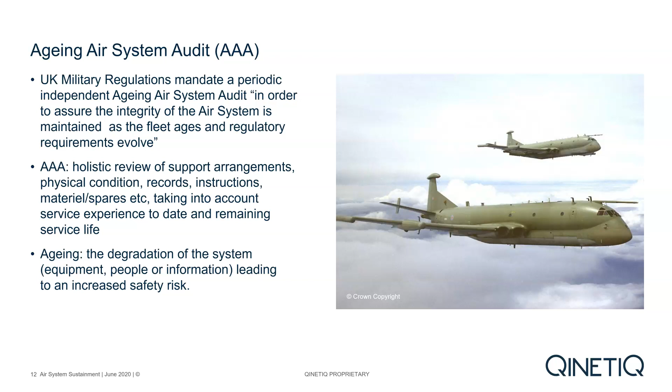The AAA team have broad experience of operations, maintenance and management, plus they bring individual subject matter expertise. In my case, safety assurance, propulsion and flight systems, such that the wider impact of changes is considered carefully. As an example, changes in flight profiles are traditionally considered to affect structural maintenance. However, there may well be an unquantified impact on engines or propellers or other systems.

Similarly, the routine change in role for some aircraft may also introduce wear into structural attachment points as a result of poor installation instructions and maintenance practices. So AAA is both an art and a science, data-based but reliant on experience and knowledge to discern how the dots are joined.

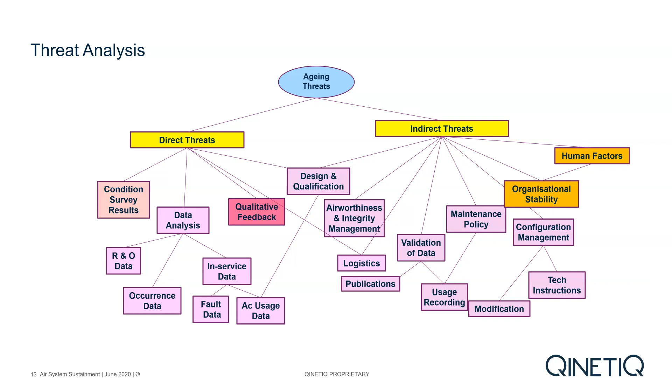One would reasonably expect the majority of operations to be covered by existing instructions for continuing airworthiness. However, there are non-standard operations, for example pipeline surveys or air ambulances and the utilisation of civil aircraft in military roles. While these may fall within the published flight envelope, they may well fall outside of what the type certificate holder assumes typical usage would be. For example, sector length, unpressurised flying, manoeuvre ranges, and the same actually will go for little used private aircraft as well. Hence my belief that some form of a sustainment review is beneficial, and indeed more so in the current COVID-induced conditions.

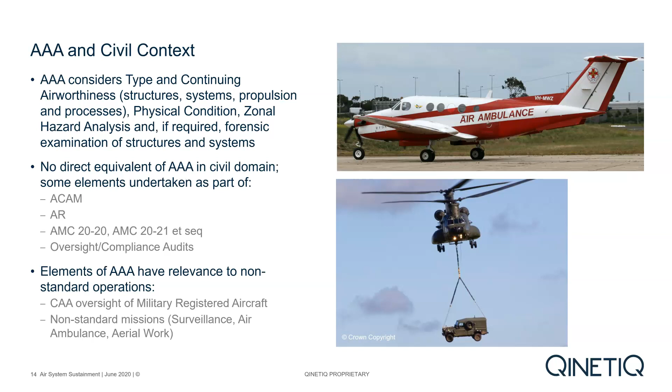QinetiQ has over 15 years' experience in AAA and has conducted them across a wide spectrum of aircraft types, from historic aircraft such as Spitfires and Lancasters, through combat aircraft such as Typhoon, Tornado. It's looked at training aircraft, support helicopters, civil and civil derivative aircraft, gliders and so on. More recently, we've been engaged to assess aircraft that are maintained under civil as opposed to military oversight.

So the first one is flexible hoses that carry flammable fluids. Now, one of the reviews identified that hoses had recommended lives that were aligned with the original service life of the aircraft, which was subsequently extended. Although some hoses had been replaced, these were neither identified as lifed items nor records retained of replacement. Hence, there was a risk of leakage or rupture.

In the interim, best practice had evolved, but had not been taken into account in maintenance schedule reviews. There was also a loss of corporate knowledge due to a series of location changes, and there was significant churn in staff. The condition survey at the time identified a 40-year-old elastomer hose in a brake system.

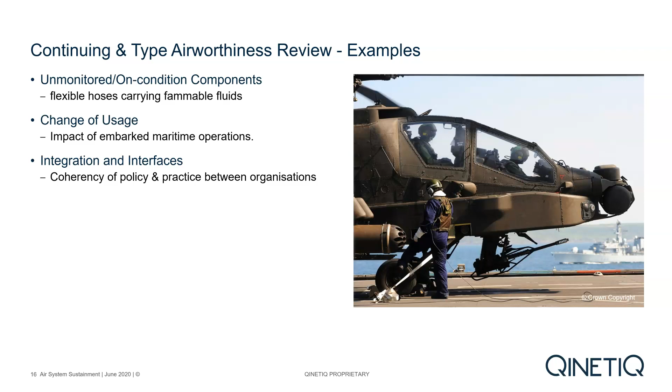In terms of integration and coherency, in one aircraft fleet, we found that there was a policy to conduct a 6-monthly review of corrosion arisings on this particular aircraft. It's quite an older aircraft. However, in practice, this pan-organisation group had not actually convened for 3 years, and in that time neither deteriorating condition of the aircraft was identified, nor the effectiveness of the anti-deterioration measures, where they certainly weren't challenged. Again, the condition survey confirmed the presence of significant corrosion that was actually unknown to the Aircraft Operating Authority.

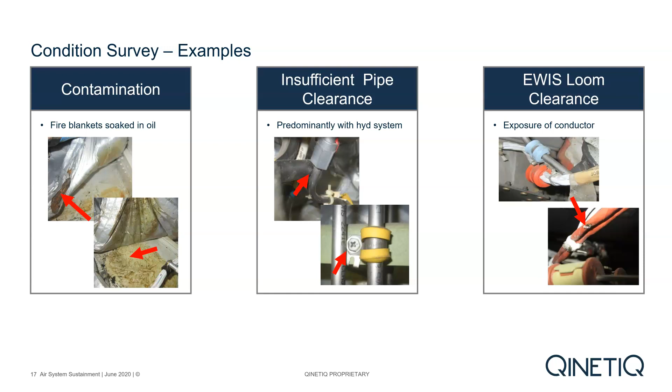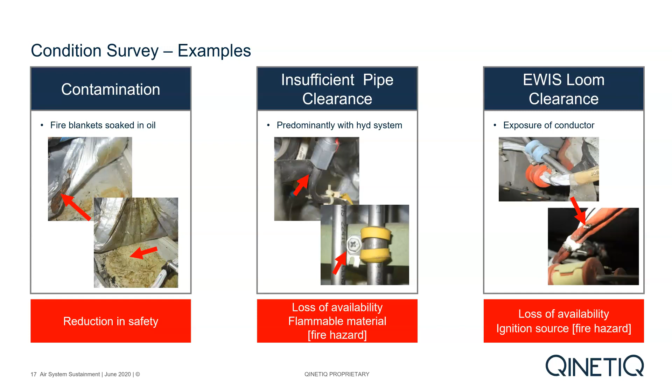We'll cover now a few examples from the condition survey. The survey is more in depth than a typical airworthiness review, and it does uncover a range of conditions indicative of a deterioration in husbandry standards, issues with design or installation, or an ineffective maintenance policy. As you can see here, fire blankets are soaked with oil, or pipe clearance, or indeed exposure of a conductor, leading to degradation in standards of safety, possibility of a fire hazard as well.

We've also found pooling of water, possibly as a result of the environment, but also potentially because of an aircraft wash. And again, the corrosion and cracking of connectors. These are more pointers towards the acceptance and indeed normalisation of the deteriorated condition and a loss of an understanding of what good actually looks like. Again, our focus here is safety, but also about availability and the additional work required to rectify it. A small amount of preventative maintenance avoids a lot of corrective maintenance.

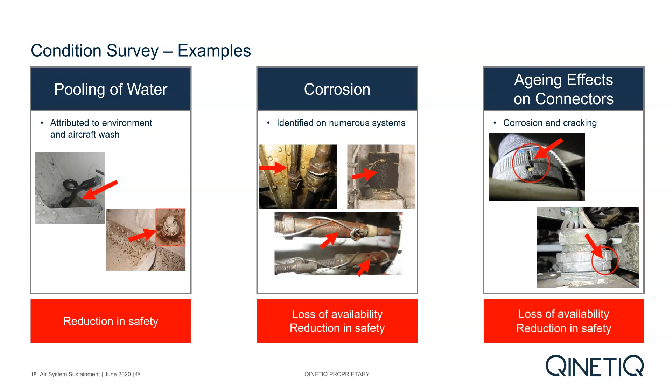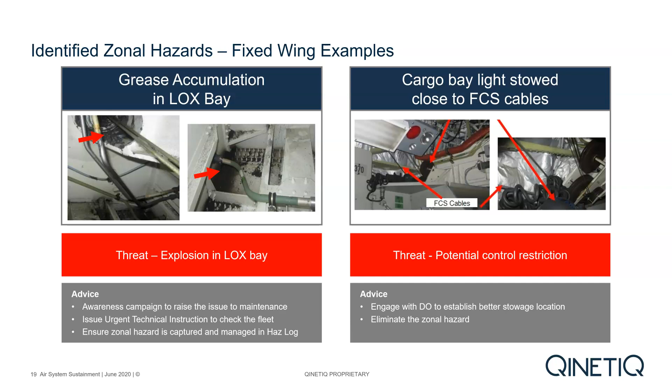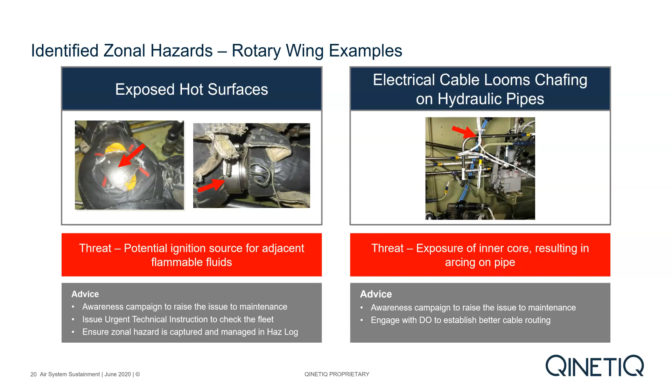In terms of rotary wing, here we've got some hot surfaces that are exposed due to deterioration in insulation and also chafing of electrical wiring on pipework. The left-hand image indicates the interaction of human elements. It's a no step, as you can just about make out, but it's clearly a convenient step up judging by the wear. The middle image is more maintenance-induced deterioration, taking the insulation off, putting it back on. And the right-hand image is more about installation. But was that as design intended or as part of a subsequent installation or modification? And again, there are recent examples of wiring and pipework interference causing fires on both military and civil aircraft.

So to conclude, a sustainment review addresses this question: how effective are your support arrangements in countering the threats to airworthiness and the safety posed by ageing? What we've seen is the review, the extent, it's flexible, but it certainly should consider how the aircraft, the operations, and the wider environment have changed over time. It should be independent of those directly involved in the operations, maintenance, or management. The likely outcomes are improvements in safety, availability, and cost of ownership. We believe that sustainment reviews do add value. They do take time, but ultimately it is about making sure that aviation is and remains safe.